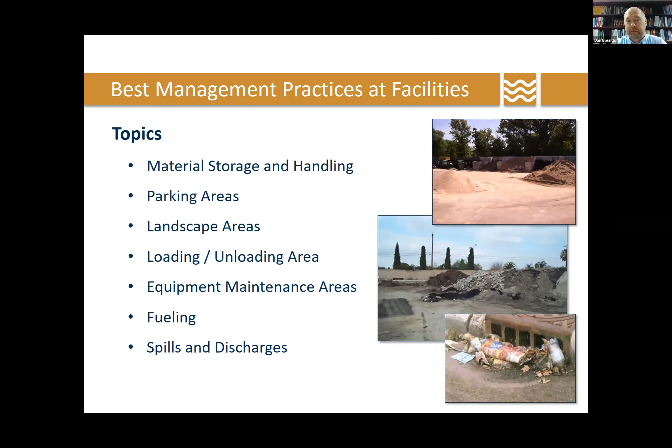So you handle many materials and you use a lot of chemicals and products at your facilities to do your jobs day in, day out in different areas. And those can become a pollutant if they are mishandled and allowed to enter a storm drain system through a rainwater runoff or a direct discharge. So you've got materials that can produce a sediment, your dirt piles, your sands. Those can generate a sediment that can get washed off, and there's general trash and debris. Your building materials and wastes from the operations that you do.

When you're working in landscaped areas, you're using fertilizers, pesticides, and those can create problems if they are misused and allowed to run off in large quantities. Your landscape materials as well, the grass clippings, leaves, trimmings, those have to be managed properly. You do several maintenance items with your vehicles and equipment, including washing. So that generates wash water. There's detergents, cleaning solutions that you might be using for degreasing and washing, and those can create an issue if they run off. You may have some salt storage at your facility, or you may be using salt in the wintertime for de-icing or other de-icers.

Mentioned fuel on the last slide in your fueling areas. Those can become pollutants if they're allowed to discharge off-site. And along with the vehicle maintenance, you've got oils, hydraulic fluids, and other type of fluids that could be mishandled or allowed to discharge. And then sometimes we're dealing with paints, coatings, other decors, and we got to think about proper control of those items too.

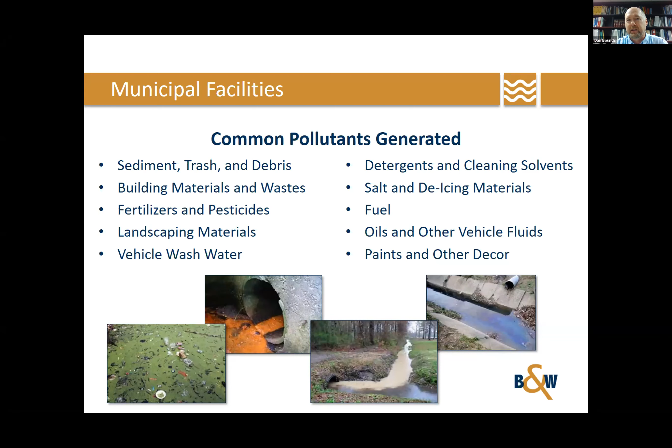The third photo is sediment leaving a facility from improper best management practices for erosion and sediment control, and it's really clouding up the receiving stream, as you can see there. And then the last photo is that oily sheen we can see from a fuel or an oil or a petroleum that is allowed to be spilled onto pavement and discharging out through a storm drain. So getting into specific facility areas and types of materials, I'll hand things over to Jack.

All right, so a lot of the bulk materials that we see stored outdoors that could cause stormwater pollution issues are things like salt, sand, gravel, cold patch, fuels, garbage and recyclables, or any miscellaneous items that you might have in surplus storage or your boneyard. The main best practices here are making sure that everything has a designated storage area and making sure that there's as little runoff and track out as possible. So if you look at this photo here in the bottom left, we've got an example of both. There's significant runoff from this cold patch. You can see there's that little trail going right to the storm sewer. And there's also significant track out from the salt that's being stored there.

So the photo in the middle on the right is an example of better containment because this has got walls on either side. There is still the potential for this material to de-water into a storm sewer. As you can see, there's a lot of liquid there on the ground, but this is significantly better. The dumpster at the bottom right is being covered by a tarp. So this is an example of some good material storage, making sure that there's no runoff that's going straight to a storm sewer. As far as the boneyard goes, regular inspection and inventory is the key, making sure that you're checking up on the status of everything that's back there.

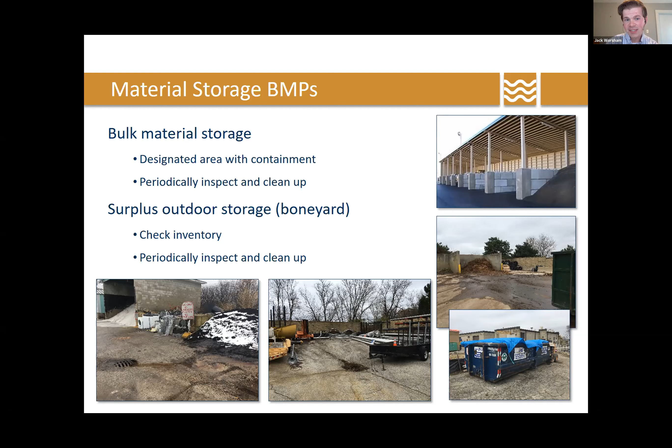Moving on to the topic of salt and de-icers, local environmental rules require permanent and closed structures for both solid salt and liquid de-icers. So whether that's a really big structure, like the one you see up there in the top right, or something that's really small, just a little container to the bottom and to the left of that. And then liquid de-icers there in the bottom left-hand corner. Once again, the key here is to ensure minimal runoff and minimal track out.

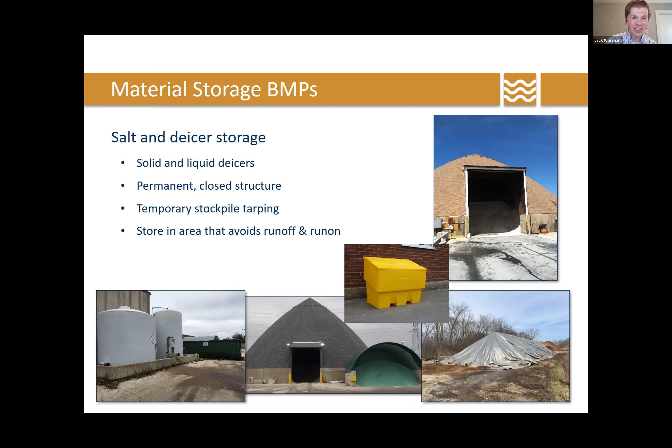These rules do allow for temporary stockpile tarping. So if you see there in the bottom right, this is allowed on a temporary basis. Again, that's just to make sure that everything's covered and you don't have significant material being washed into a storm sewer during a rain event. So I think our next speaker is going to touch on that a little bit more. So to avoid stealing his thunder, I'll move on.

Not surprisingly, there is a whole smorgasbord of materials that can be on a parking lot, anything from oil to hydraulic fluids to litter that someone's tossed out of their car, landscape waste, you name it, it's going to be there. And if the parking lot isn't maintained, it's going to wash into a storm sewer during a rain event. So the key here is to use dry cleaning methods, whether that's manually or with a vehicle sweeping. If you do need to wash a parking lot with liquid, oftentimes it's a good practice to block those storm sewers so you can trap the water and dispose of it in another way, just making sure that you unclog those storm sewers once you're done.

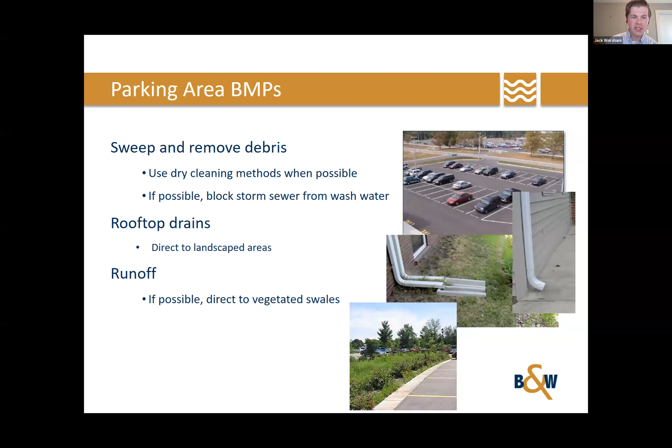As far as rooftop drains go, you've got an example of a good and a bad here on the left and the right, respectively. Rooftop drains should always go to landscaped areas as much as possible. If a rooftop drain goes straight down to pavement, that water is going to go straight into a storm sewer and it's going to cause pollution issues. The more water that you can direct into a landscaped area or a vegetated swale, the better. Those swales in particular, like what you see here on the bottom, those cause significantly less runoff and they do a really good job of removing those pollutants prior to anything passing into a natural water body.

On a similar topic, landscape waste is something that's frequently overlooked. So these are things like grass clippings, leaves, and sticks, things that get turned up during landscape activities. So if you see here in the middle photo, you've got a whole bunch of grass sitting there on the curb line. This is not only a pollution issue for when the rain event comes and that gets washed into natural water bodies, but it's going to be a maintenance hassle as well, because all that material is going to get caught in a catch basin.

So the key here is making sure that all of that material is disposed of either as trash or as compost, making sure that it's not just left out there to cause pollution issues. Same goes for soil. That's why mulch is so important, using mulch on exposed soil. As best you can, using non-toxic chemicals for landscaping purposes. And if you do have to use chemicals, making sure that you're not using it right before a rain event. Because if a rain event comes along and those chemicals haven't fully absorbed yet, not only is it a waste because that's all going to get washed away, but now it's all being directed to a natural water body.

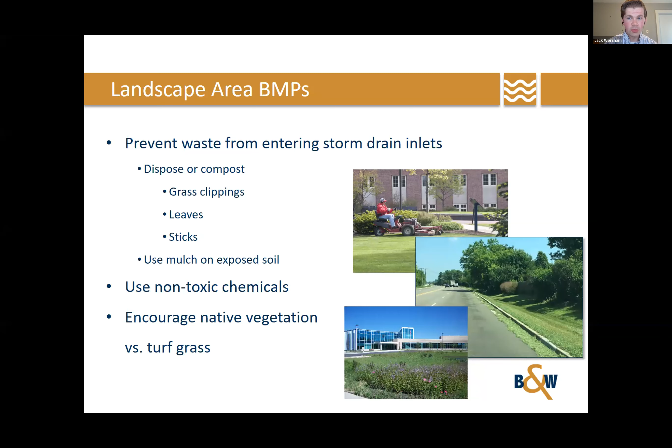And here in the bottom photo, you can see an example of using native vegetation, native prairie vegetation, as opposed to turf grass. This is advantageous, one, again, because it does a good job of pollutant removal, and then two, because it causes significantly less runoff than turf grass does.

For the loading and unloading areas in your facilities, the ideal loading and unloading area is going to be far away from a storm drain. It's going to be effectively bermed, and it's going to be connected to a sump so that any liquid that gets on the ground is going to go straight to a sump. That's not always necessarily the case at every single facility.

So knowing where these storm drains go is really important, and making sure that if you are near a storm drain, you're protecting it as much as possible. So some ways to do that are doing all loading and unloading under dry weather conditions, or if possible, underneath a canopy. And again, that's just to make sure that there's as little liquid involved as possible, and you have as little chance of something passing into a storm drain as possible.

If there's a liquid transfer, using a drip pan is a really good practice, just to make sure that in the event of a spill, it's going to get caught by that and not going straight into a sewer, not dewatering there, as you can see in these two photos. And then if there's loading and unloading going on inside, providing a seal or a door skirt so that if a spill were to occur, it's going to stay contained and it's not going to be going out onto pavement and into a storm drain.

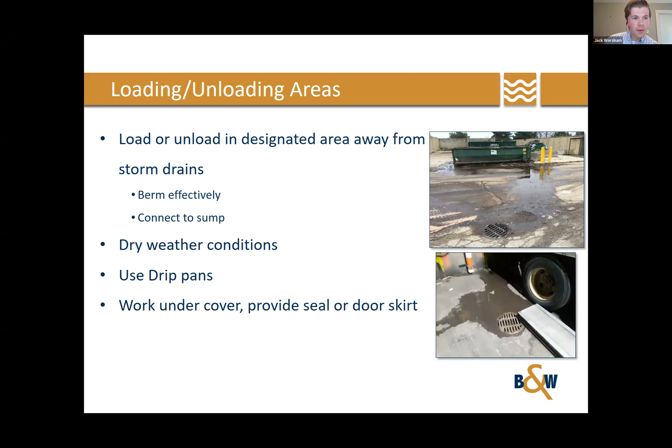Things like painting, grinding, coating, sanding can be performed outside sometimes, but again, a key there is to perform that activity during dry weather so that any of that material is not directly draining off with surface runoff and can be cleaned up, swept up and disposed of properly. If we're doing outside maintenance that involves changing oil or hydraulic fluid, something like that, using drip pans or some sort of containment to prevent any spills, leaks from getting onto the drive surface. I've even seen crews use tarps down over their equipment area so that when they're done with their maintenance activity, they can sweep up or collect those tarps and keep that material contained.

Again, like we've mentioned before, non-toxic chemicals or less impact to the environment would be the type of products that we want to use if we're working outdoors. And using those dry cleanup methods, shoveling up that debris from the maintenance, not letting it run off, sweeping it up if it's a small amount, and disposing of that properly, and not letting it come into contact with stormwater.

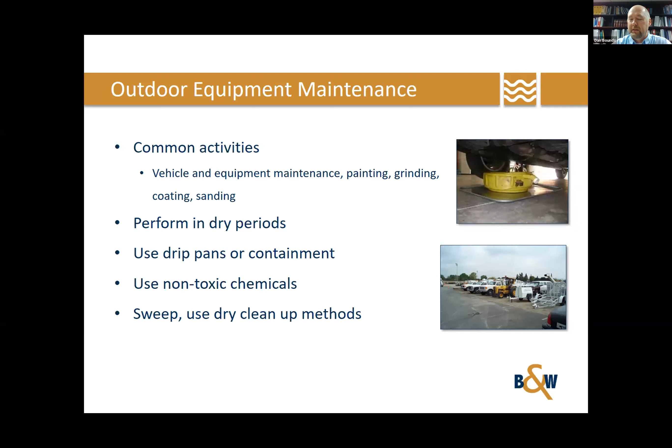And then back to the fuels. You know, it's a safety hazard, and we're dealing with flammable liquids, but they're also a water pollution threat too if the fuels are allowed to run off with stormwater. Some of the largest fish kills I've seen in our area have been caused by fuel spills, accidents, or fuel releases. So you may have above ground storage tanks at your facility, you may have below ground storage tanks, or you might just be using small cans to fill pieces of equipment in different parts of the facility.

We have to first think about proper training, make sure that staff know where fuels are supposed to be stored, proper storage containers, and what areas are safe to be fueling or handling or transferring fuels within. Part of the inspection protocols for your facility should include these fueling areas and the hoses and the nozzles, checking for drips, leaks, make sure that everything is in good working order and we're not losing fuel periodically onto the pavement. And then I can't say enough about having a spill kit on hand.

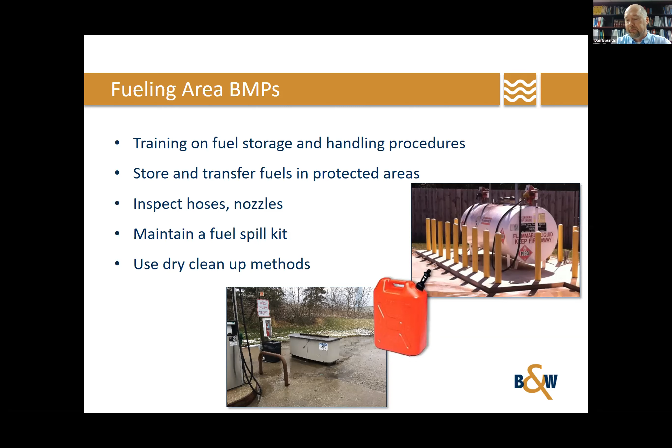So spills do happen. They're pretty frequent, and accidents do happen in life. The important thing is being prepared for them. Create a spill response and control plan, and make sure staff are trained on where spill-prone areas are and what material could be spilled, how to properly respond to that, where the material is for cleaning that up, and who they should report spills to in the event that they happen.

So again, maintaining that supply of spill cleanup materials, storing the containers and materials away from storm drains, and having those spill kits or materials nearby when that spill does happen. Checking containers often for leaks as part of those routine inspection items at the facility. Drip pans, again, can be used for the transfer and maintenance of fluids, so that if a spill or drip does happen during that event, it is contained by that spill pan.

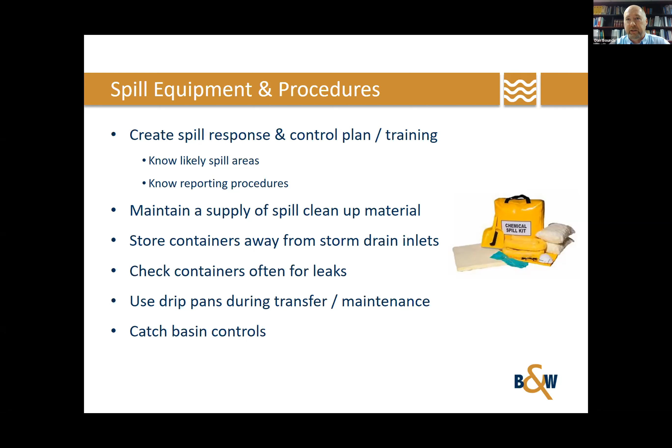And then Jack mentioned blocking nearby storm drains at times when you may be transferring large amounts of material, just to make sure if a spill does happen, it does not enter that storm drain. It can be properly cleaned up. So if a spill occurs, take a look at where that spill is happening and what might be downstream, or where that spill might be heading to. Assess those downstream areas. Contain or block the storm drain if you've got time and the equipment to do that, to prevent that from getting into the storm drain system.

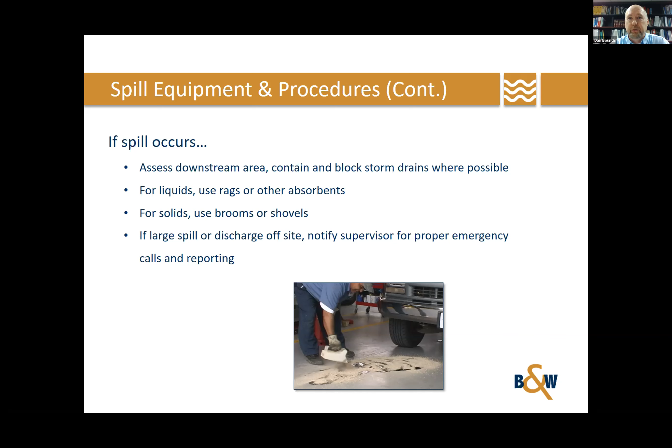For liquids, we're typically using rags or other absorbents to soak up that small spill and properly dispose of those rags, depending on what the material is you're soaking up. For solids, we're using a shovel to clean those up, or a broom to sweep up that material and properly dispose of it in the trash or back onto the stockpile where that material came from. In the event of a large spill or a discharge that has spilled and entered a storm drain and left the site, that's something you're going to want to notify your supervisor of right away for proper notification, proper reporting, and emergency protocols.

So non-stormwater discharges are any type of water usage at the facility that would generate wastewater that we would not want to get into the storm drain system. This could include vehicle and equipment wash water. This could include landscape irrigation water, if you've got a broken nozzle or things might not be set right within an irrigation system that's creating a discharge and picking up pollutants, bringing that into the storm drain system. I've even seen large air conditioning units have a flow from condensate lines and create a non-stormwater discharge from the facility. So the key here is knowing what's permitted to get into the storm drain system, and what is a wastewater or a wash water that needs to go into the sanitary system.

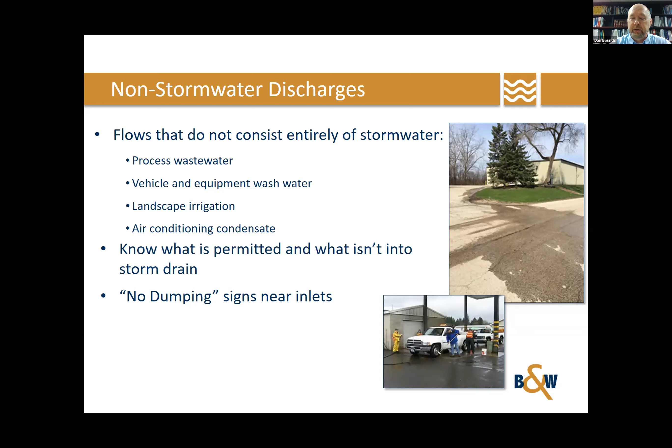So sometimes you'll see drain inlets at your facilities or out in the street labeled as no dumping, or drains to creek, drains to river, and that's a good thing to do for the inlets around your facility to let people know that they are storm drains. They are draining to a local waterway and not draining to a sanitary line or to a wastewater treatment plant. So preventing direct connection of these types of non-stormwater flows is the key. If you've got a small condensate from an air conditioning unit, like in the top photo, that can probably drain into a vegetated area and be just fine. But other larger flows of non-stormwater, we do not want to have entering the storm drain system.

So this is something, again, as part of your routine inspection and looking at your facility from time to time. Look for problems with your non-stormwater discharges. Are they creating flow off-site? Look at the outfalls, or where your stormwater is eventually leading to a natural water body, and see, are you losing material? Or is there any evidence of staining or other types of problems that materials or runoff from your facility might be creating?

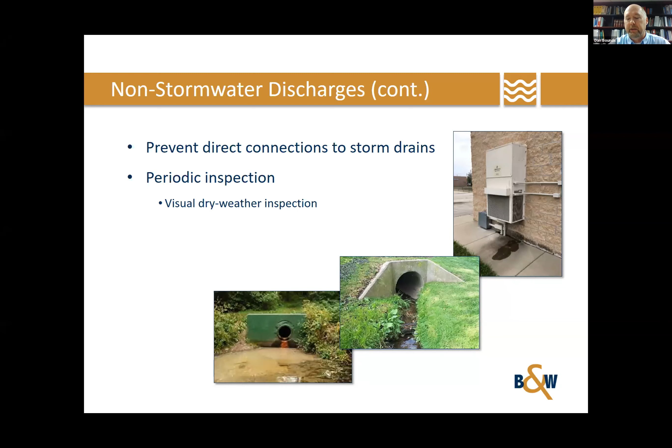And in other areas of the country, a stormwater pollution prevention plan or a stormwater control plan is required for municipal facilities. And these documents contain what materials and products you use, where they're stored and located throughout the facility. Where are your drain inlets and where do different areas of the facility drain to? What are your best management practices for controlling those types of materials and activities in those areas? Who are the responsible parties that work at your facility for implementing those? And inspection frequencies, reporting procedures, documentation and things like that.

The top photo is one I've worked on in another state, which is a maintenance control plan or a stormwater pollution prevention plan for a municipal public works facility. And the middle photo shows the typical outline for one of these plans. It can be a good idea to put one of these together, even though they're not required in this area, and organize it like this example, where you've got your pollution prevention team organized. What are your pollutant areas? What are the best management practices that you implement? And it makes a good training tool and a good documentation tool for proper stormwater quality management at your facility.

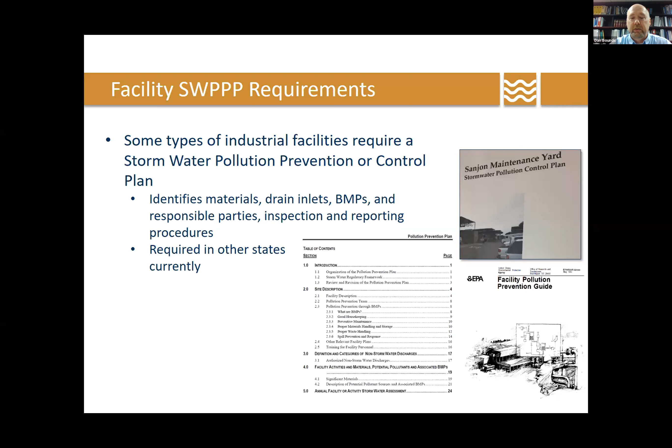These concepts aren't new. EPA was putting guidance out for facility-specific pollution prevention plans over 20 years ago, like in the lower right photo.

So with all of that, in summary, I hope I've gotten you to think about your facility from a stormwater quality perspective and a local surface water quality perspective, and about the materials that you're using and storing at your facility. Thinking about ways to store those materials away from storm drains and how to protect those storm drains from discharges or material loss when handling equipment and materials.

And the idea of periodically inspecting and taking a look with your stormwater glasses on when you're walking around your facility, to think about your storage areas, proper containment for materials and liquids, looking for leaks or signs that leaks might be forming, and where your drain inlets are and how to protect those. Make sure staff have the proper cleanup material for spills when they might happen. And use those dry cleanup methods: avoid washing down a spill, avoid washing down material that might be on the pavement and directly discharging that to a stormwater body.

So the upper photo shows an area that was called non-compliant in a public works facility in Illinois. And it's just because the dumpster lids were open. The area was well swept. Good housekeeping practices were being performed, but the fact that the lids were open created a violation, because stormwater could get into that material and drain through the dumpster, or material could blow out of that dumpster and create a pollutant or a trash and debris discharge.

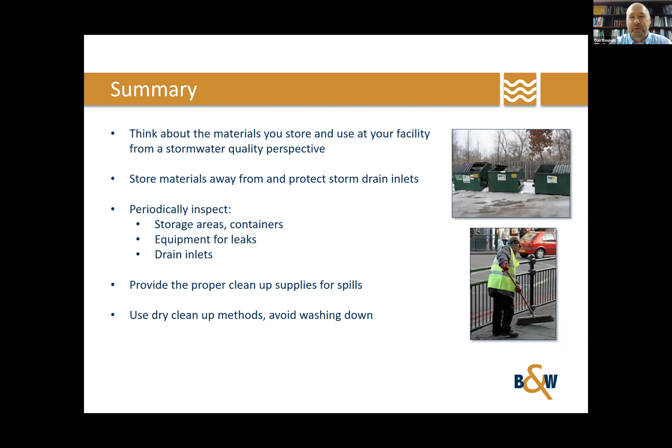So we want to be like the guy on the bottom there. He has been trained and he's using that training. He's got his cleanup equipment in hand. He's got his broom. He's using a dry cleanup method. He's sweeping that material on the surface rather than just washing it down into the storm drain inlet. And he's protecting that storm drain. So that's the main message that we're trying to send to you all today. And with that, Jack or I would be happy to answer any questions that you have.

Okay, great. Thank you very much, Dan and Jack. Great job on the presentation. Very nice. I do see one question here. It says, is a tarp an acceptable permanent cover for a dumpster, or should it be for temporary use only?

So great question on tarping for dumpsters. I've seen environmental compliance audits mention this several times, and it can really be a pain to have a tarp on a dumpster if it's being used frequently, where you're taking the tarp on and off. But it's something that has been specifically mentioned in compliance evaluations at facilities. And what I usually recommend is, if you've got a dumpster or a large roll-off box for a lot of construction debris, something like that, that it be tarped when it's not being used.

So if construction activities are happening around that roll-off box or large dumpster, it can be untarped for the loading of the material. But if the shift is done or the work has ceased for the day, the tarp should be put back on that dumpster or roll-off box. So it's definitely not a permanent cover, but while the dumpster is there, we've seen audit findings that say it should be tarped when not in use.

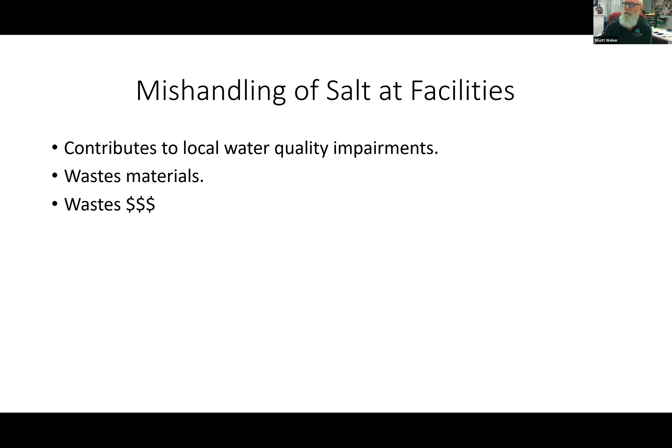So as it was stated before, the permit requires that salt be stored in a permanent structure. This is an old dome that the Village of Hanover Park had 6 or 7 years ago. It was a 3,000-ton dome. It is on an asphalt surface with asphalt surrounding. This particular unit had no storm basins around it at all. You can see by the photograph that the pad was extremely flat. It held water, so we had minimal runoff.

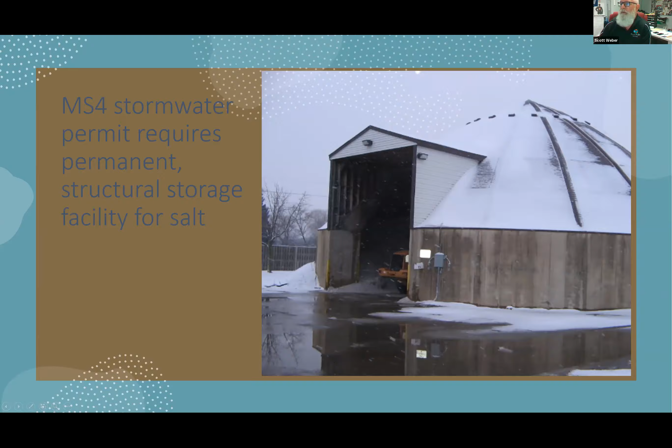The old one did not have a door, but you'll see our newer one here in a bit that does. So dry salt storage tips: of course, indoor is always the best. It's been said multiple times about impervious surfaces. Doors should be away from prevailing winds for a multitude of reasons. You get blowing snow in there and you get extra melting and stuff. All your areas should be swept up and cleaned after an event, and make sure that your storage is away from lakes, rivers, and storm drains.

You can see on the right-hand side of the photograph there, that looks like a spill somebody had from shifting their load. Either the tailgate wasn't properly adjusted or the wings were not proper. It looks like somebody went to shift their load for spreading and then didn't go back and clean it up. Back in the 90s, you would have something like that, and our cleanup process was to put your blade to the curb and push all that excess material to the curb. Can't do that anymore.

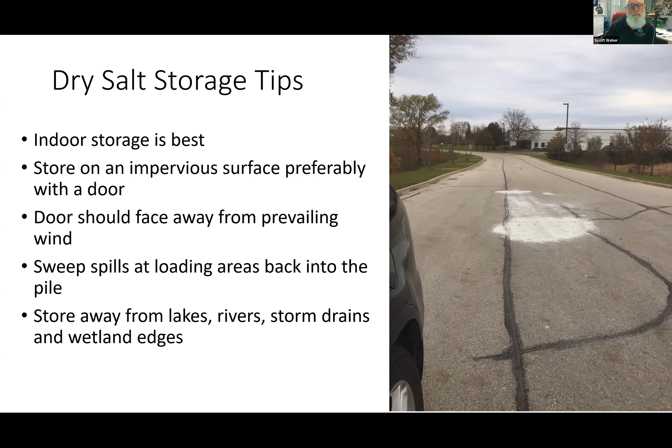Here's some examples of different salt storage domes from small to large, and including a couple of tarp issues.

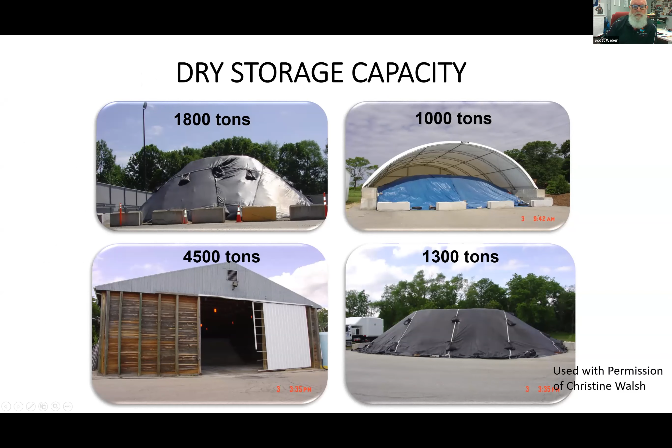During dry months, we try to do it in a 1-week period so we can minimize the amount of cleanup. If you stretch it out for a long time, you're cleaning constantly. Again, we try to do it when it was dry, just to minimize any runoff or any problems.

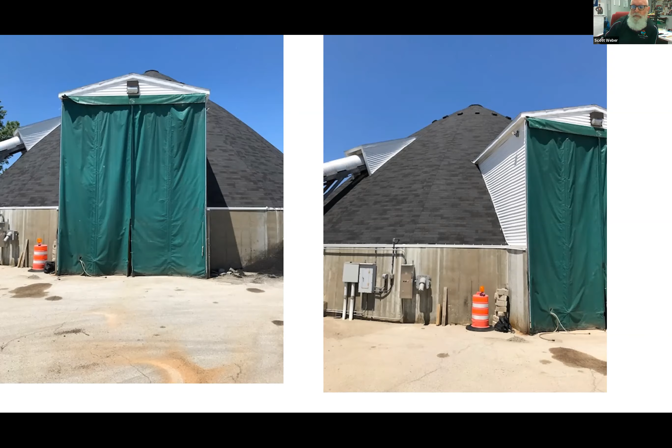Here's another picture of a dome in the city of Elmhurst. I believe this is a 6,000-ton dome. It's probably one of the larger ones I've seen. Different styles, the barn style, where trucks will back completely inside. They would have the ability to fully raise their bed and dump their whole 20 to 22 ton load inside the dome.

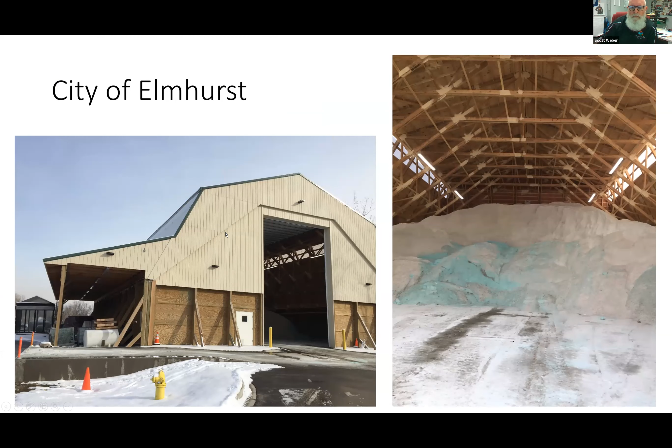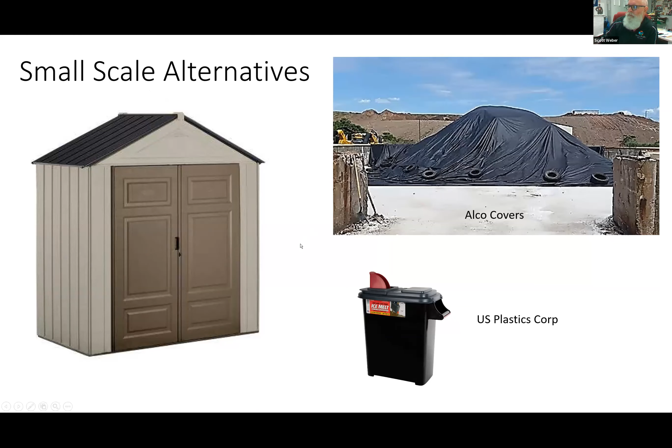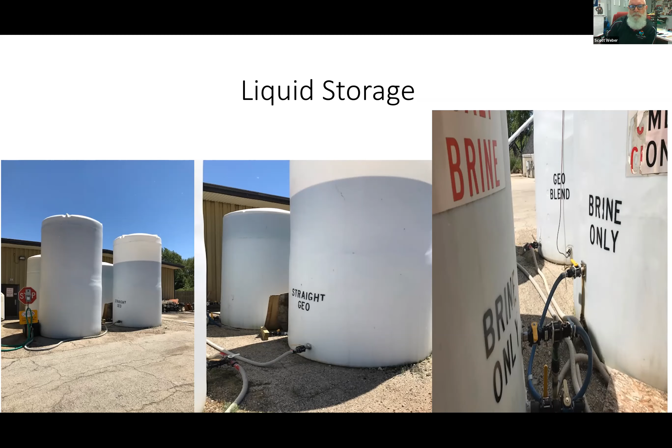Management and recording. It's really important to know how much material you have in your dome at the beginning of the season. It's more important to know how much has gone into the truck, how much is going onto the pavement, how much is being spread per lane mile.

And as a rule, the Salt Institute back in the 90s came up with a rule of thumb that when you're purchasing your salt, if you have the storage capability, it would be best to have 150% of the average use under roof at the beginning of the season to eliminate more loading, more trucks on your process, and you shouldn't have to run out.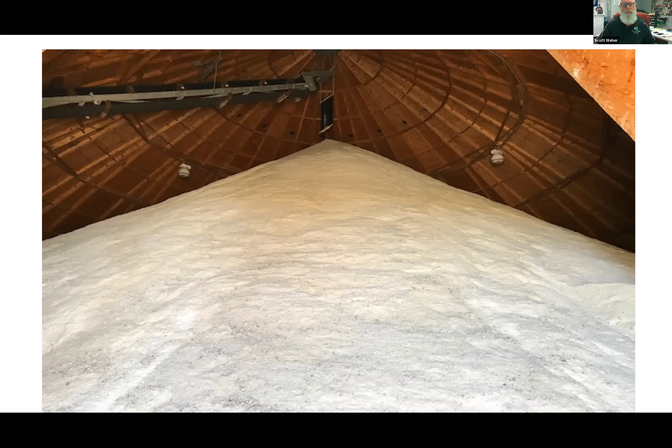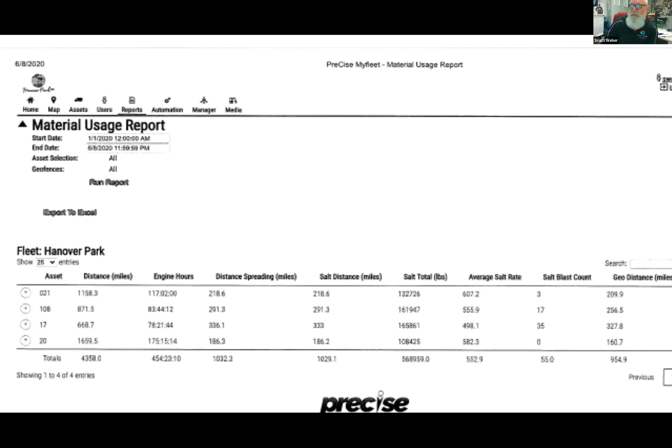With that, we generate our summaries for the season. We do our tracking now a little bit different. We go by fiscal year, so part of the season is in last year and part of it's in this year. So for every event in 2020, I know the cost of equipment, labor, how much salt was used, how many miles were driven. And I can tell you that we used about 760 tons this past year with 30.1 inches of snow at O'Hare.

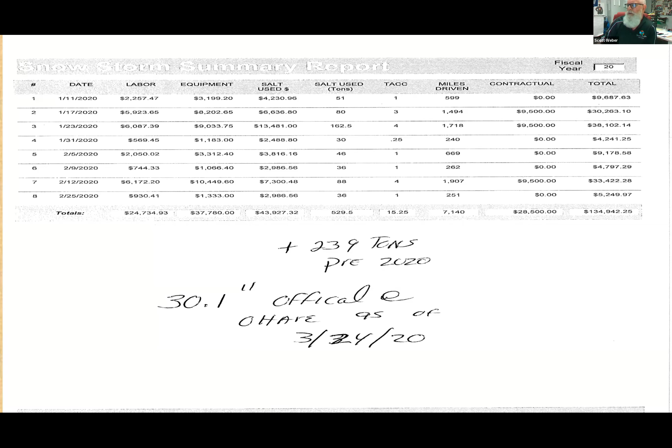We have 100 center lane miles of road. Keeping the loading area clean: make sure your operators are properly trained in loader operations. You get a new operator in there and he goes to load a truck and spills 2 tons on the pavement. That's all got to be cleaned up.

One of the most important things is your drivers have got to use caution when they're shifting their load in the loading area and on the roadway. All of our trucks are set up with steel spill plates, wings on the tailgates. So when you are loading and you raise your box up, it tries to maintain the majority of the salt in the truck. If a driver is careless when he raises it, he'll leave 2 trails or 2 piles on the roadway that have spilled out.

Any and all spills should be cleaned up at the end of an operational period. Loaders, skid steers, brooms, shovels are the best methods, dry methods, as was spoken of before. And the supervisor should be responsible for monitoring the area so that we don't have any spills or any problems.

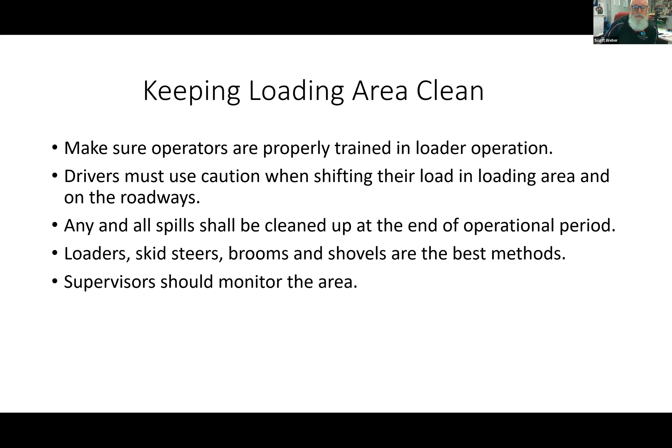Monitoring the area for our liquids: what we do in the fall, usually around September, we will start to hook everything back up. We will have an empty tank with clear water from a fire hydrant, and we will do our testing of our system to make sure we don't have any leaks in fittings, valves, or hose. We've probably got 300-400 foot of hose on the ground out there. So we've got to make sure that everything is in good condition.

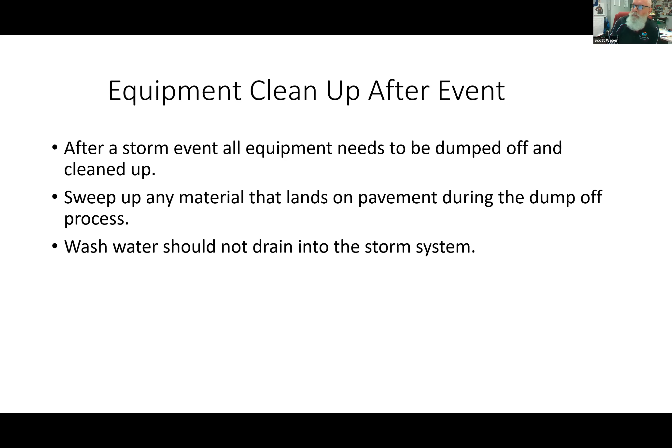It's important in your snow manual to have everything spelled out for your material storage and handling, what to do in case there is a spill, how much material, or the way the material should be removed from the pavement, spills in the street. Everything should be spelled out in your snow plan. Plans need to be reviewed by all of your operators in the fall so that everybody's on the same page and we don't end up with any major problems.

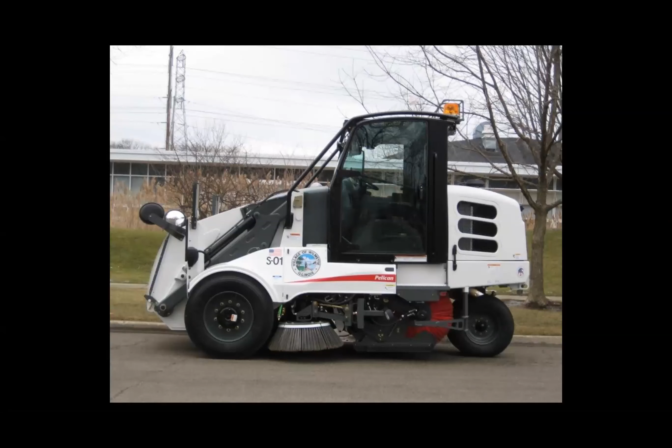So we have 2 street sweepers. This is our mechanical sweeper. It's an Elgin Pelican. Mechanical meaning it's all broom, sweeps up debris onto a conveyor and then goes into the hopper in the front. This is when the unit was brand new. It's a 2012, I think put into service in 2013. We typically try to get our sweepers on a rotation of 10 to 11 years or so. They get a lot of high use, and they are high maintenance items for us. But that's part of the nature of street sweeping.

With the mechanical sweepers, the benefits are they do a good job with the larger debris on the streets, which is particularly useful early in the spring. We usually start up our program in the middle of March, and coming off the winter, you've got a lot of aggregate in the curb line. So it does a good job of that. The downside is it transports pretty slow, and the hopper size is smaller. Next slide.

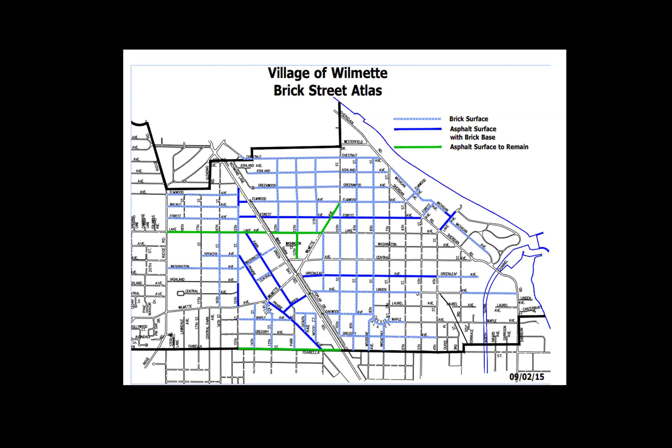Our streets are comprised mostly of asphalt, some concrete. And then on our east side, we have brick streets, which are kind of an interesting dynamic, but a little over half our streets on the east side of town are all brick. Some of them are overlaid in asphalt, which the village is transitioning back to brick as those roads come up for resurfacing. Next slide.

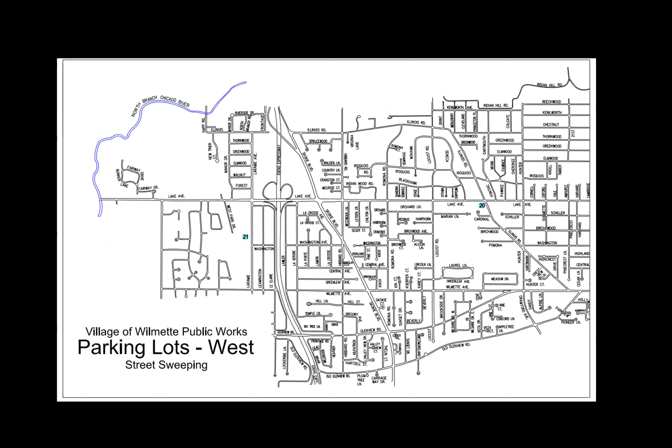We also have a rotation for our parking lots. So besides all the streets, we do sweep the parking lots. I think we have about 20 or so, including facilities, with over 1,100 parking stalls that we maintain. Parking lots get swept probably 3 to 4 times a year. Next slide. So that's our east side, and that's the west side; I think there's just 2 listed on this map. Next slide.

Then we also have another tier of service where we do our business district areas. So we have our downtown area, Wilmette Central, our Green Bay corridor, our Ridge Road corridor, and our Linden Square area, which is near our CTA station. These areas we sweep with more frequency, I want to say upwards of 10 or more times a year, and that includes all of our parking offsets, all the little knuckles and all that.

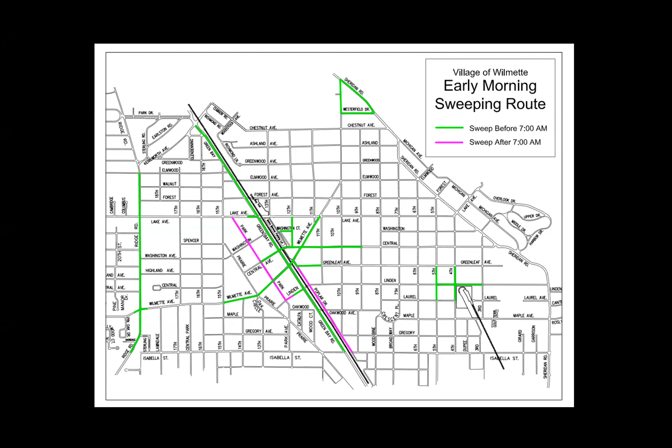And most recently, the last couple of years, we've added some green alleys. These are grant programs with the district. So you have the permeable pavers, porous pavers. We've got, I think, 5 or 6 right now, and I think we're looking to add a few more. Next slide.

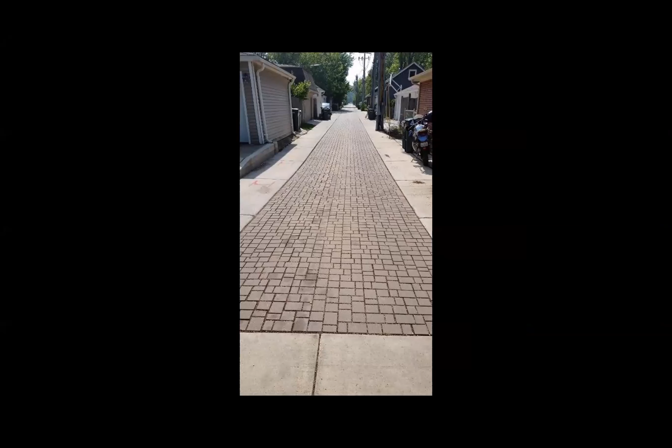So this is what they look like. In general, we sweep all of our alleys twice a year, usually first thing in the spring, and then later on in late summer, before we transition into leaf collection. Now the green alleys get serviced more often because we have to protect the integrity of the porous pavers. So we're at least on a quarterly program on those, if not more. Next slide.

So in summary, we have our general street sweeping, our parking lots, our central business district areas, and our alleys, and in total we generate 700 to 900 cubic yards of debris a year from those operations. Excluded from that is our leaf collection season, which starts mid-October and goes through the first week of December. That's when our sweepers are out constantly following behind our packer trucks and pushers.

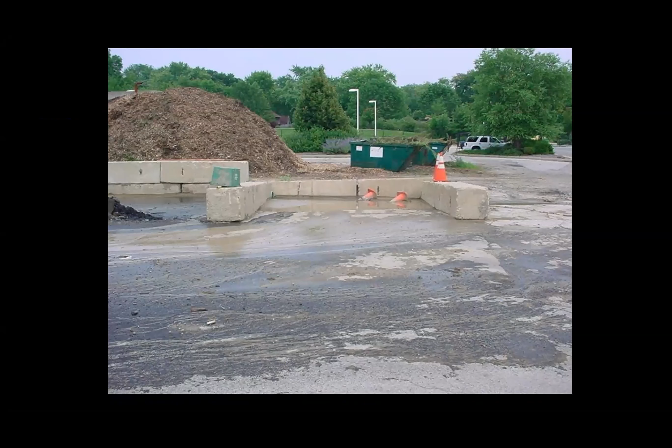So this is kind of what we had prior. Unfortunately, I don't have a lot of specific or good photos of the sweeping or the leaf bin there. So a lot of what you're going to see are just the spoils and debris, but it's a similar setup to what you see here that we had.

It's funny when you do these presentations, you go back and look in your archives of photos, you think you have stuff, and then it's like, oh, I don't have anything.

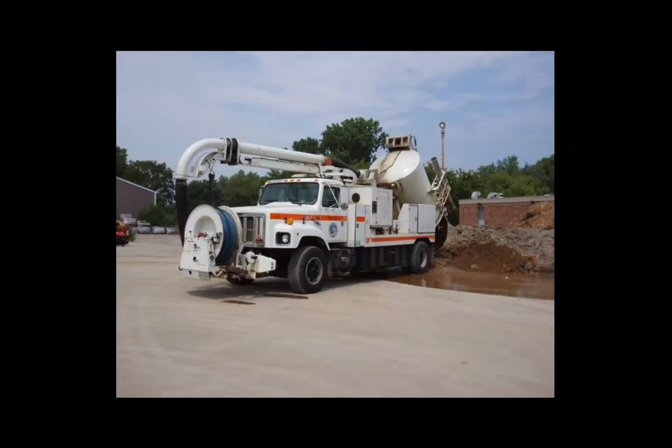But this is, again, simply what we had prior, which is nothing great, as you can see. Next slide. So this is prior to 2005. This is one of our old Vactors, and this is them just dumping debris into that area that you saw before that was outlined. Next slide.

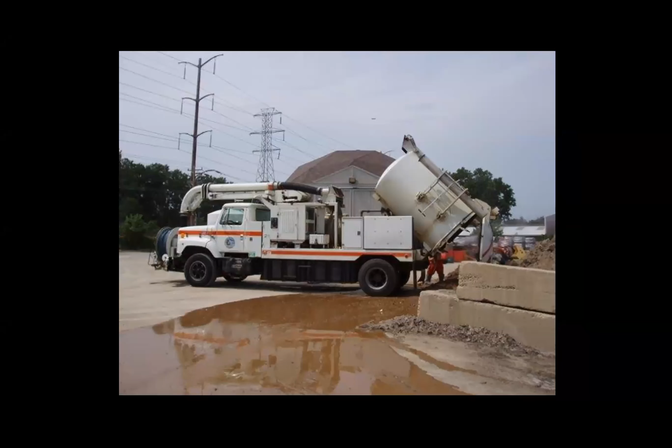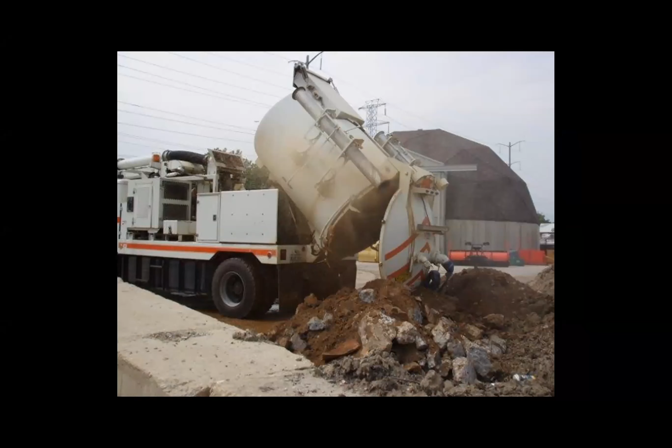There's another photo that kind of shows it. Again, best management practices, is everything being followed here? No. So need for improvement. Behind you see our salt dome. Next slide. So again, more of our debris. Next slide. Next slide.

Okay, so those pictures kind of showed you what we had. So then we went to the project for 2009, and it was a multifaceted project. All I'm going to show you is what the improvements were for the material storage, basically the two bins for our spoils and debris with water, sewer, and our street sweeping. Another part of that project was we actually had a garage and a wash bay installed, but I'm not going to be showing that.

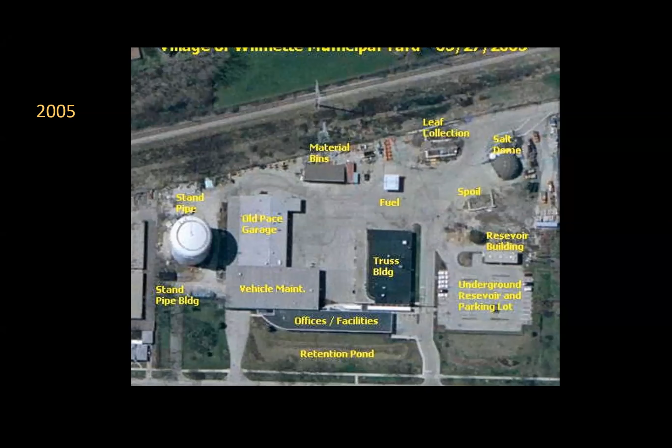And then we also had an admin building constructed, which you'll be able to see. I have another overhead shot later in the presentation, which I'll show you. So this is kind of the before, and then I'll show you an after photo. So next slide.

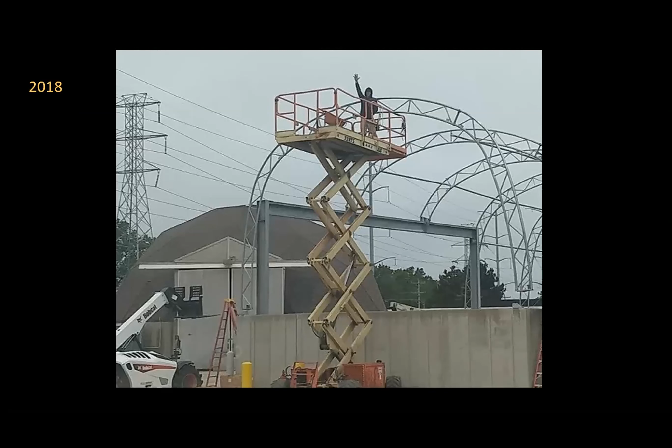So Baxter and Woodman was our consulting engineer on it, and they worked with Britespan, the local outfitter, I think it was Friedman Buildings, and they basically came to us with a solution that was cost advantageous for us, and we were able to fit it in as part of the project. It was wrapped up, I think, before the winter season of 2018.

As far as a roof application for our needs, as you'll see, it worked out very well. It was kind of a one-stop shop for us because they have the engineering capacity on their side. So they do all the structural engineering, you can see with the beams and the framework and whatnot, and then they do the install. So it was the full envelope type package, and it worked out great. Next slide.

So this is what the final product, the roof, looked like over it. The next couple of slides will show that. Next. So you can see that. Now what was kind of unique about this is the way that the walls were orientated and the openings. You can see they had to do some custom design there to accommodate our water sewer spoil side and the street sweeping.

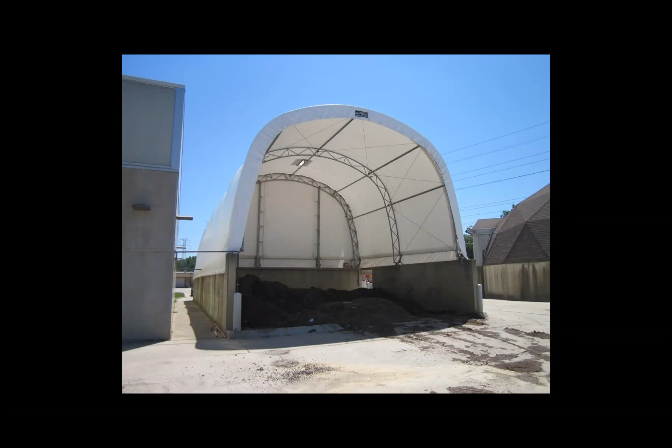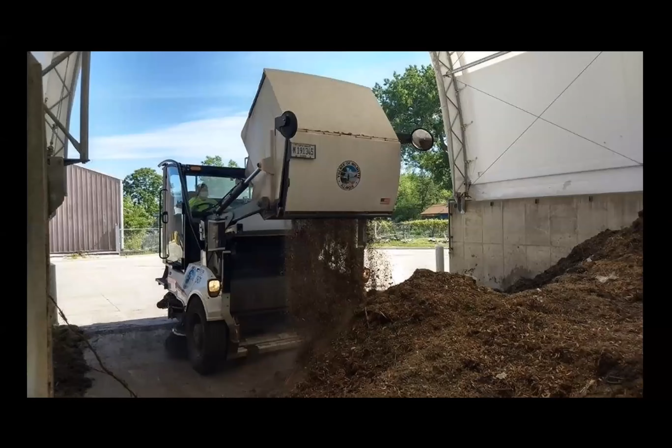Now I apologize. It's a working facility and a working site, so our cleanliness and housekeeping here isn't exactly perfect. But next slide. So this is our mechanical sweeper. You can see where it is able to pull into the facility and dump. Next slide. So here's another photo of it. Next slide.

Now, several slides back, one benefit that we had with this roof application is those are structural walls. So what made it kind of nice is when they were engineering the roof structure and the anchoring, that just helped with the integrity of it. But if you're looking to build a permanent type of structure and you want to use this fabric style roof application, and you're starting from scratch, you may want to consider building some structural walls to give it strength. That ended up being a benefit for us.

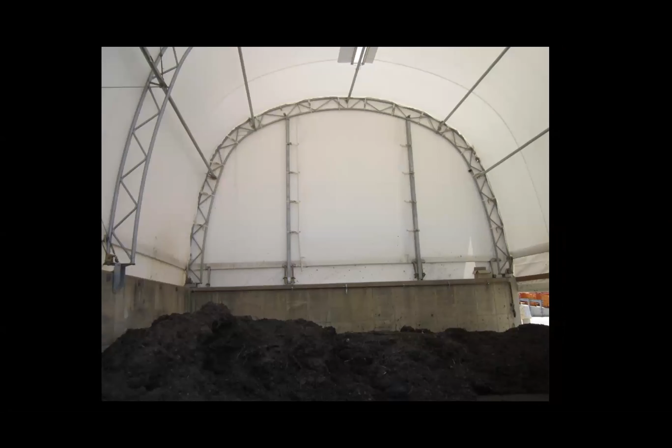The cost of the fabric roof structure was significantly less than your conventional construction type, wood, metal, shingled roof type structure. We've had this up and running for about 2 years now, and it's been very durable for us. The long-term life of this is to be determined, but hopefully a long, useful life is our goal. Next slide. There's just some other photos, and it shows you the design of the bracing and the structure. Next slide.

Now, this area is 30 by 30. It is pretty full. We do have a separate contract with a hauler where all this debris gets hauled out, and the way the contract's set up, they have to take it to a lined landfill. Actually, all of our debris, including our spoils. So this is probably about 3 truckloads. It's street sweeping material, so you don't want to stockpile it. The stuff does decay and have an odor, so it has to be hauled out on regular intervals. What you see here is just from this past week, and trucks have been scheduled to haul it out.

So it's something you have to periodically schedule, and it's just a constant where you have to haul debris out. Is this size adequate for us for sweeping? I would say, yeah, it's pretty good. Could it be a little bit bigger? Yeah, maybe. But on the whole, it's pretty good. As far as takeaways, they're kind of similar to the spoil side.

It would have been nice if we had, with street sweepers, the operators have to clean them out every day. So you need a water source nearby, which we do have. But they have to be cleaned thoroughly at the end of the day, just to upkeep the equipment. And it would be nice if there was a pad that was tied in, where all the material would be contained together.

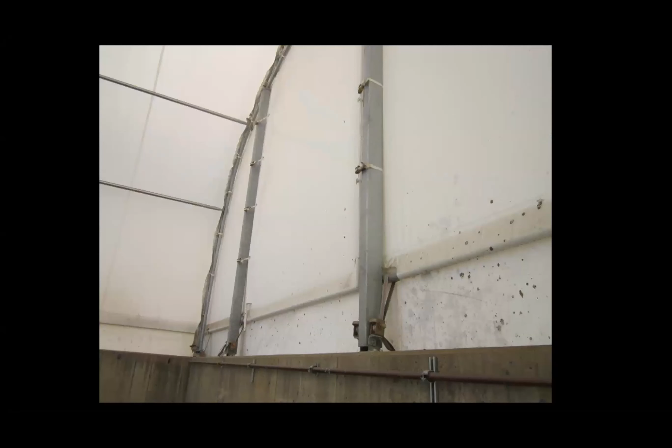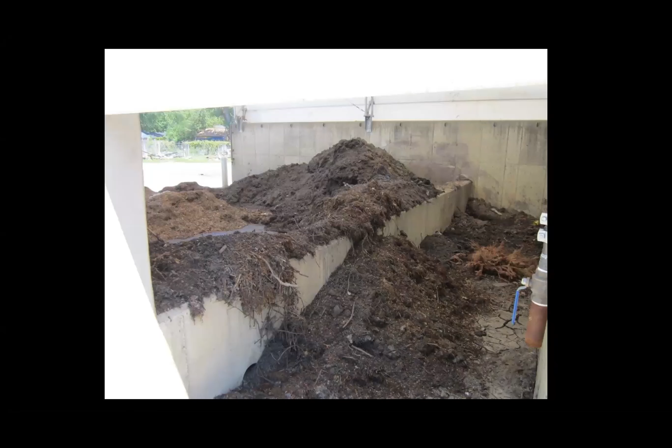And then it's just some more of the hardware. What you see down there is just some water line that's running through there. Next slide. So for the street sweeping side, here's that wall again. At the base in the forefront there, you can see a little bit of a remnant of some of the holes that were drilled in to allow the stuff to drain in.

Obviously, it doesn't take much for this area to get dirtied up, but there is a drain that drains into our sanitary. But yeah, it's an ongoing maintenance thing. If there's one thing that you want to pay attention to when you're designing and constructing these, you definitely want to look at what you're draining to and your cleanup. And you want to design it to make it as easy as possible to keep it clean and maintained.

This particular width, unfortunately, is not quite wide enough where we could fit a skid steer in there to clean it. So basically what we're relegated to is once we get our main bin cleaned out, we'll back in or bring in one of our backhoes, and we just have to clean it out that way.

One thing that we did look at for an improvement, since we were ripping up all the pavement around it anyway, was installing a triple catch basin, and I think that would have been a good way to go if anybody's looking to construct these. Unfortunately, we ran into some difficulties in funding and it wasn't going to work out. But if you're starting from scratch, I would highly recommend that you look into incorporating that for maintenance of the facility.